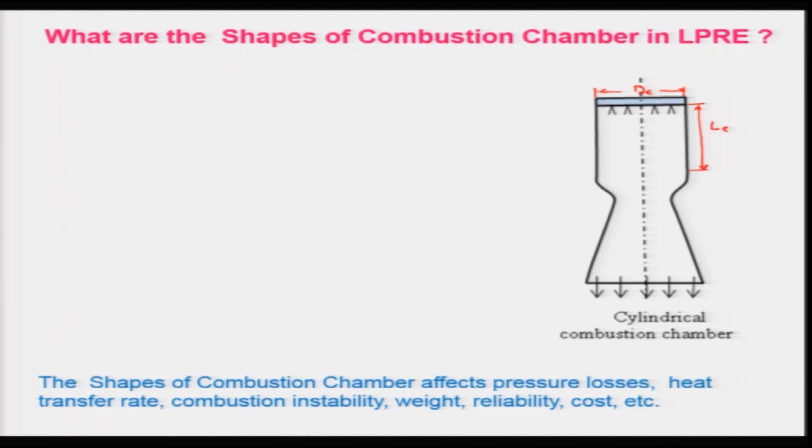And there are several parameters which will be affected by the proper selection of the combustion chamber. In other words, the shapes of the combustion chamber affect the pressure losses, as I told, and also the heat transfer, because the heat will be transferred through the wall. So, this heat transfer also will be affected by the shape.

And combustion instability: if the length is higher, people say that maybe it is subjected to some axial oscillation of the pressure, and then one can get combustion instability. If the length is higher, the weight will be higher, and also the reliability will be good provided the smaller diameter. And when the length is higher, the cost also will be higher. However, if the diameter is bigger, then the drag of the engine may be higher. That depends upon the range in which one operates. So, this is the cylindrical combustion chamber which is being used profusely at this moment across the globe.

But there are several other shapes one can think of. One is the spherical combustion chamber, and the spherical combustion chamber is basically the one which I have shown here. It is having a lower surface to volume ratio, so that the space utilization will be very good. However, the problem is how to mount this injector, because on the curved surface one has to struggle with manufacturing, and also design changes have to be made.

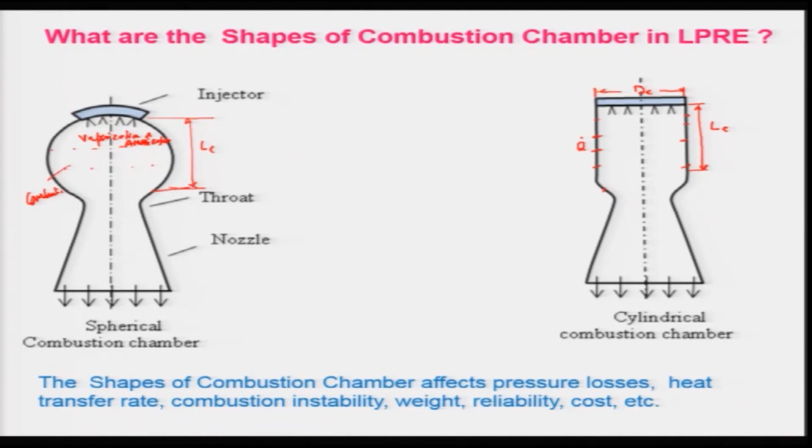So, as a result, the complete combustion may not take place, and besides this, it is difficult to fabricate this shape. However, it can withstand high pressure because it is spherical in nature, but manufacturing-wise it is quite difficult. The German people had used this kind of spherical combustion chamber, but because of this inherent problem of manufacturing and incomplete combustion, they abandoned this idea.

Some people have now combined the spherical combustion chamber and cylindrical combustion chamber and come up with a new one which is known as the near spherical combustion chamber, which has a certain spherical portion. However, it has a flat head, where the injector head can be placed very easily without much problem. And here the length has been increased a little bit for the same volume, such that one can get a little larger residence time as compared to the spherical one, so that the combustion can be more efficient, ensuring better performance.

Besides this, you can have various other things, like a diverging portion. There can also be a combustion chamber with a throatless nozzle. So, there are various varieties one can think of, and the shape of the combustion chamber will depend on the imagination of the designer and also the requirements at hand. So, one can really find various ways and means; that is the beauty of engineering, where you have a lot of luxury of innovating and making new systems, so that they can be more efficient and amenable for better use.

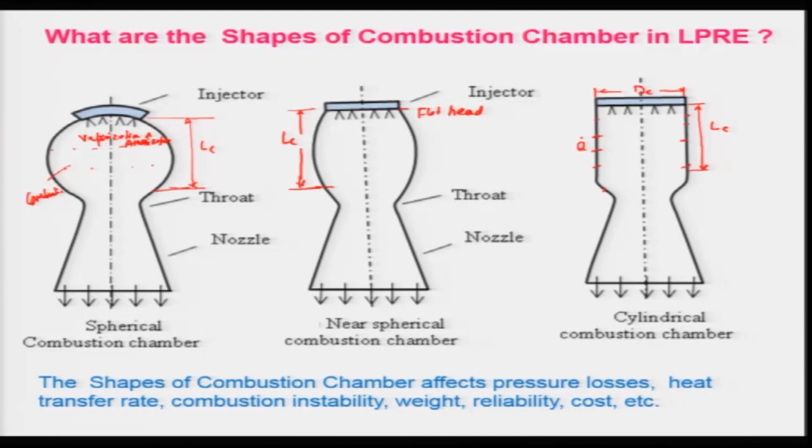So, let us now look at the most important component which supplies the propellant to the combustion chamber, that is the propellant feed system. The propellant feed system is very important, as I told, because it is required to inject the liquid with the help of high pressure gas or a high pressure system. It is very important to have a proper feed system such that the pressure losses will be minimized. At the same time, you can operate for a longer range, and you can also have high pressure such that atomization can be efficient and effective.

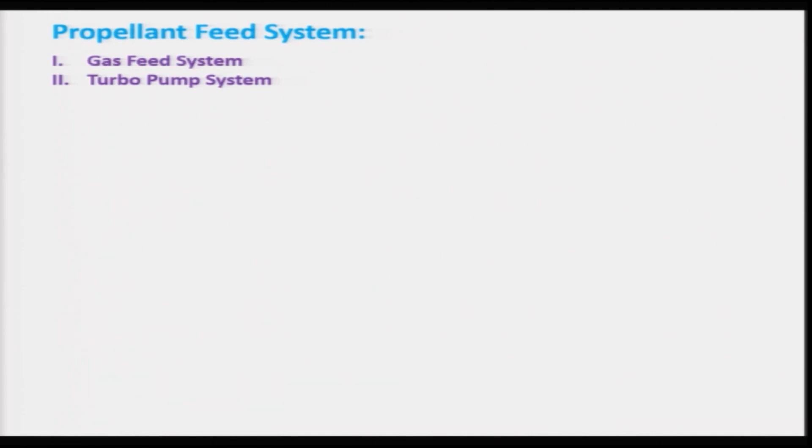So, depending on the type of system being used, the propellant feed system can be broadly divided into two categories. One is the gas feed system, the other is the turbo pump system. In case of gas feed, we use high pressure gas to pressurize the liquid propellant, which can be injected into the combustion chamber through the atomizer. Let us look at a typical gas feed system, in which high pressure gas is used in this tank; generally nitrogen, helium, or argon gas are used, which are inert in nature, stored in a high pressure tank.

And then there is this flow regulator and also the pressure regulator, which must be used such that constant pressure can be maintained downstream of this valve, so that the liquid can be expelled into the combustion chamber at a constant pressure. Keep in mind that the gas will be coming to this, and there might be a separator, a diaphragm kind of thing, or a piston, and that will be forcing the liquid to expel into this cylinder. This is your injector head, and similar things will also be used for the liquid line. This is your liquid fuel line.

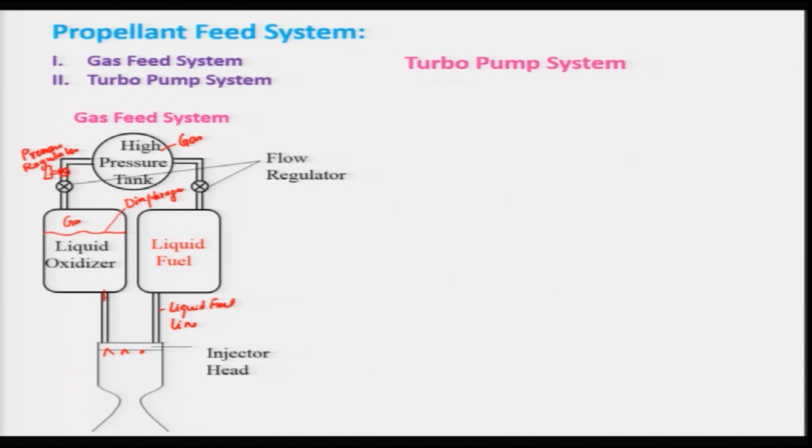And another one is basically known as the turbo pump feed system. In case of the turbo pump feed system, what is being used is liquid oxygen or the fuel or the liquid oxidizer. It can be oxygen, it can be also another oxidizer, and in this case, in place of the high pressure gas tank, the oxidizer pump and the fuel pump are being used. Generally the centrifugal pumps are preferred over the axial ones.

And keep in mind that this pump has to be run by some external device; generally the turbine is being used, or people can use also a motor, but in rocket engines we cannot have that electrical energy to be used, therefore, we use a turbine. And to run the turbine, you need a gas generator. We use this oxidizer and fuel and burn them in this.

This is your gas generator or a combustion chamber to produce some gas which will be passing through this, and it will be generating the power, right, and then of course, it will be expanded and exhausted at the exit of this turbine, and then this power will be transferred through the gearbox to this fuel pump and the oxidizer pump.

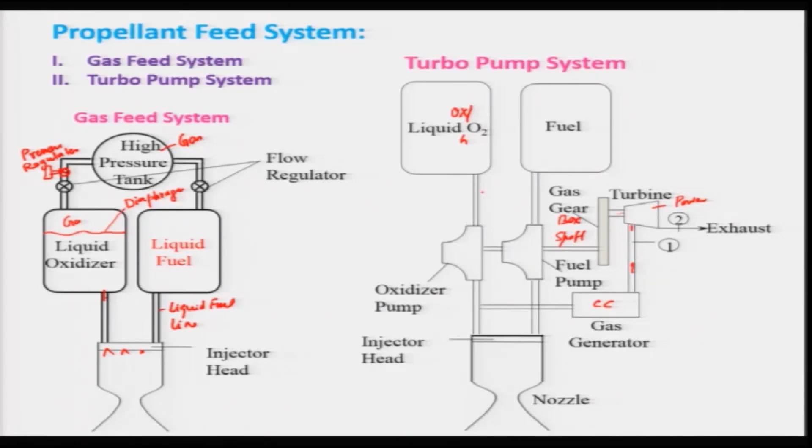So, the turbo pump system is basically quite complex and intricate to design and develop as compared to the gas feed system. Therefore, the gas feed system is used for smaller and short duration liquid propellant rocket engines. So, let us now classify the liquid feed systems. If you look at liquid propellant feed systems based on the pressure level required, we can have the gas pressure feed system, and then we can have the turbo pump feed systems.

And the gas pressure feed system is again divided into three categories. One is high pressure inert gas, as I told, nitrogen, argon, helium can be used. And there is another one which is known as the vaporized propellant gas. That means you just use some liquid propellant and vaporize it using some heat or some other process, so that it vaporizes and the pressure will be increasing in a closed chamber.

And there is another one known as the chemically generated gas, and this chemically generated gas can use either the solid propellant or the liquid propellant. So, one can say solid propellant gas feed system, in which the solid propellant is burned and the gas is produced in a constant volume chamber, such that the pressure will build up and that can be utilized for pressurizing the liquid propellant.

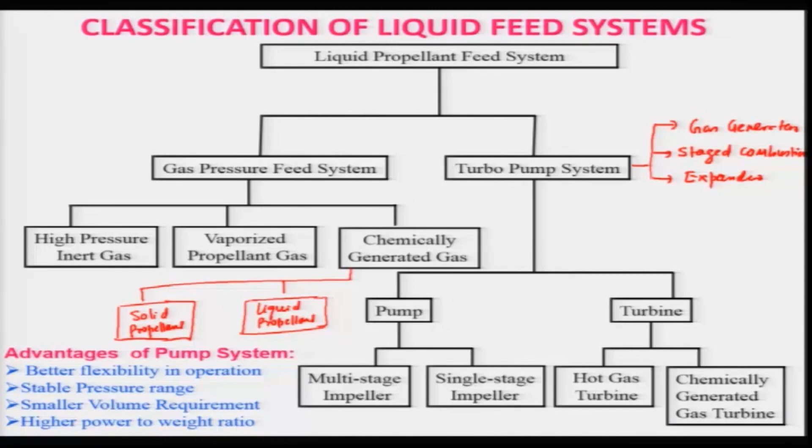And keep in mind that the gas pressure feed system can be a hot gas pressure system, because by heating, its pressure can be increased so that you can have compact and better pressure feed systems, which we will not be discussing at length, but maybe I will talk a little about it while analyzing. So, let us now look at the analysis of the gas pressure feed system. We will use a very simple analysis, and consider a typical gas pressure feed system.

There will be a gas tank where the inert gases are stored at high pressure. Let us say P naught is the initial pressure, T naught is the initial temperature of the gas in this high pressure gas tank, and mg is the mass of the gas stored in the initial state. And there is a pressure regulating valve, an on and off valve or control valve, and this is your gas feed line. Keep in mind that this is a liquid which has to be pressurized or pushed through the rocket injector so that it can be atomized.

And in this free volume, where the gas will come and push this diaphragm or piston, whatever is used, the pressure will remain constant, that is Pp. When the pressure regulator and the on and off valve are open, the gas will push the liquid into the atomizer, and at the end of the propellant supply, P naught will come down to PR, which I call the residual pressure, and TR is the residual temperature. Below this residual pressure one cannot really operate, because the pressure regulator will not work below this.

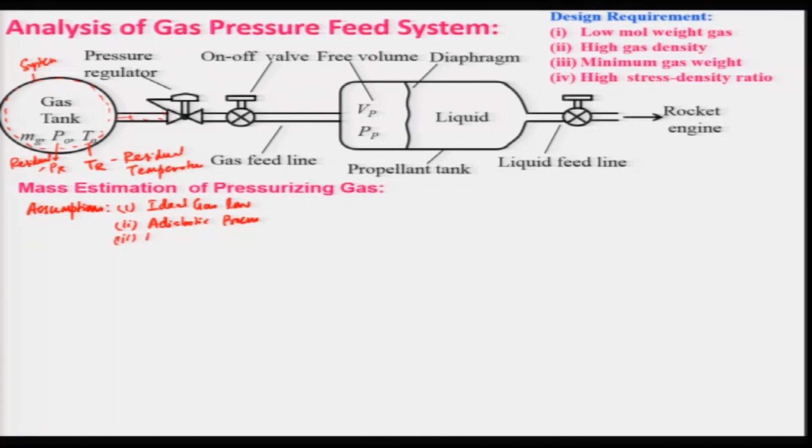So, the assumptions we can make: one is the ideal gas law, and we are considering the adiabatic process, no heat being transferred, although the gas is expanded in this gas tank from higher pressure to lower pressure. Keep in mind that PR will be much lower than P naught, and so also TR will be much lower than T naught. Another assumption is that the mass in the pipe is quite small, to be neglected.

So, we will look at the energy balance, as we know that gas is stored in this tank at a higher energy level, and during expansion it reduces, and that energy is utilized to expel the liquid propellant at a high pressure into the combustion chamber. So, by invoking the first law of thermodynamics to this system, we can have the change in internal energy between the two states, the initial state and the final state, when it attains the residual pressure and residual temperature, equal to dW.

Keep in mind that the energy will be reduced, therefore the change in internal energy is negative, and this is your work done by the gas, and this is your internal energy. U is your internal energy change. So, this equation we can call equation 1.

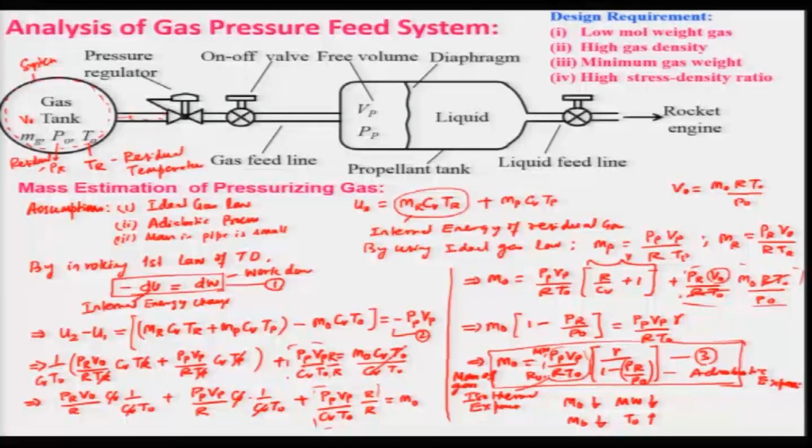Therefore, the initial temperature can be increased. That is why the hot gas pressure tank is being used. That means, one has to heat the gas by various means, which we will not be discussing. So, with this simple analysis one can find out the mass of the gas that can be stored, and this term is basically the mass of gas required during the isothermal expansion.

So, with this I will stop, and in the next lecture we will be discussing the turbopump feed system by considering an example.